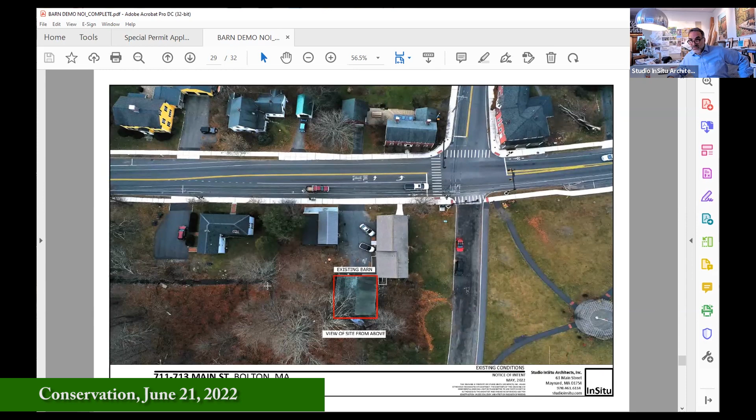Okay, so I've skipped ahead to the graphic portion of things. The first 29 pages I'm happy to return to if we think that's helpful. By way of orientation, the existing barn outlined in red, view from above, and of course a little tougher to see. The stream is underground, daylighted starting somewhere around here, exposed under the barn, underground again, daylighted here. And that edge is roughly consistent with our property line.

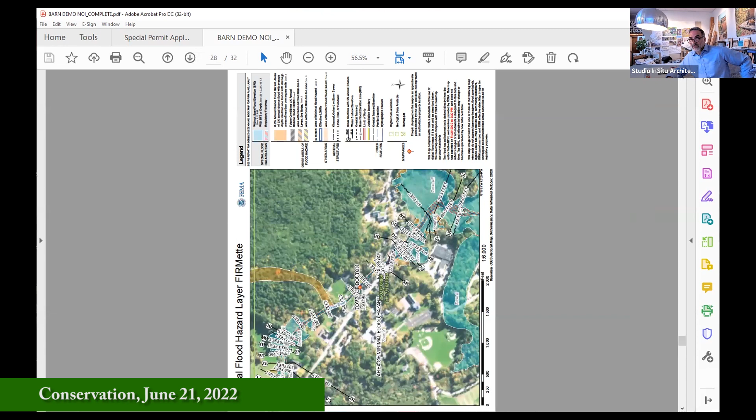Whoops, which way am I going here? Apologies, my scroll wheel is ticklish. Oh, I guess that's it there. Here we go, that's what I'm looking for. Let me try a different method here to get through image by image. There we go, all right. Give me a moment to zoom on this.

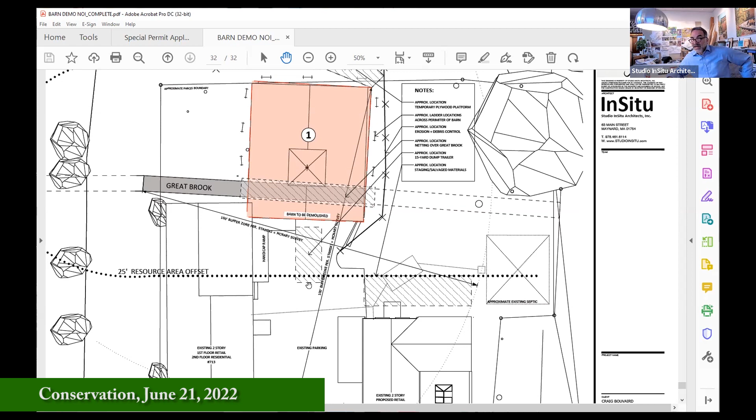So the way this would work is that trailer would be loaded up on a daily basis, and at least 3 times a week it would be removed from the site. In speaking with the demolition contractor anticipated for the job, he indicated 5 days a week. I'm just trying to hedge my bets a little bit and say probably 3 days a week at least, that would be out of there.

So I'm hopeful that the board would see some advantage in a dump trailer rather than a dumpster that might reside there in a kind of ongoing, longer way.

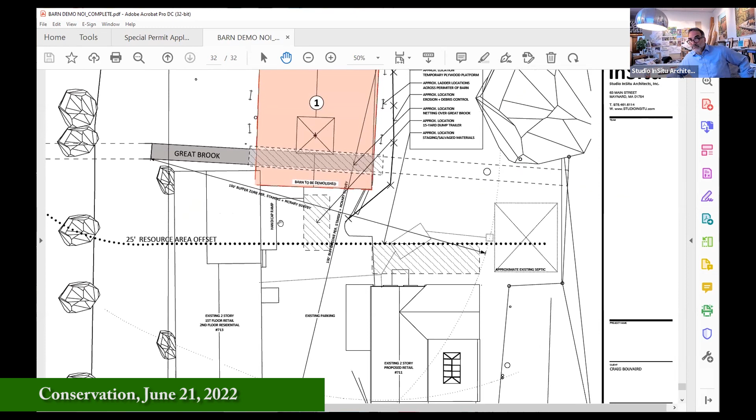So I think this graphic pretty well describes our erosion and debris control locations, the staging of the materials, the staging of our dump trailer, our point of access, except for that initial work that would happen by hand on the cladding. The rest of the work would happen from within the barn, with movement all in this direction.

So the controls indicated to the north and east would be for all those pieces of construction that didn't do what we intended to do. We're not going to be in here pushing anything out that way, we're going to be pulling everything in. So this is to kind of catch accidents and overspill and things that don't behave as we'd like them to.

So I think that's probably a good overview of the graphic.

Shall I, Mr. Chair or Rebecca, would it be helpful for me to move through any of the preceding pages and highlight some things there, or how would you like to handle this? It would be fine. I'm trying to think what are some of the things you're looking to possibly highlight.

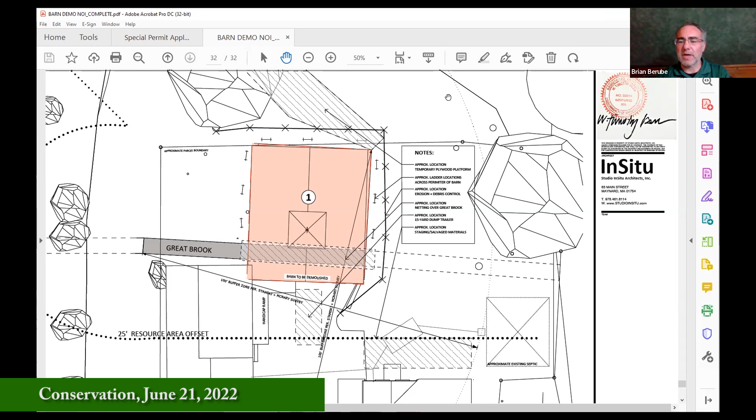I was going to ask you, you tarp over the stream, excuse me, during demolition, careful not to get anything in there, but once it's removed, before anything else is approved or anything else goes in, what's the condition that the stream's left in at that point? Are the tarps removed and it's just left exposed? Are we covering it over with something again? What was proposed for after demolition for how the stream is to be left, basically?

Yeah, that's a good question. We had not proposed any particular treatment or protection for the stream after. My sense would be that it would be essentially daylighted by the removal of the structure above and around it. Yep.

Okay, maybe I'm not sure what else you imagine, maybe some fall protection kind of thing for folks that might be accidental. No, it was more of a curiosity, and I'll probably follow it up too by asking Rebecca, is there anything major to expect from changing that section of stream that's kind of been in the dark for so long, to daylight. I don't foresee that as an issue, but I'd be curious as to what Rebecca said.

But it would be more protecting it against any type of erosion before something else is rebuilt there or proposed, what it would be exposed to as far as runoff. In theory, when you're done with the demolition, you're pulling up the erosion controls, but now that there's not a barn there and it's just a lot, do we have to worry about significant runoff down into the now exposed stream? I guess is where I was looking at that, just for the time in between, basically.

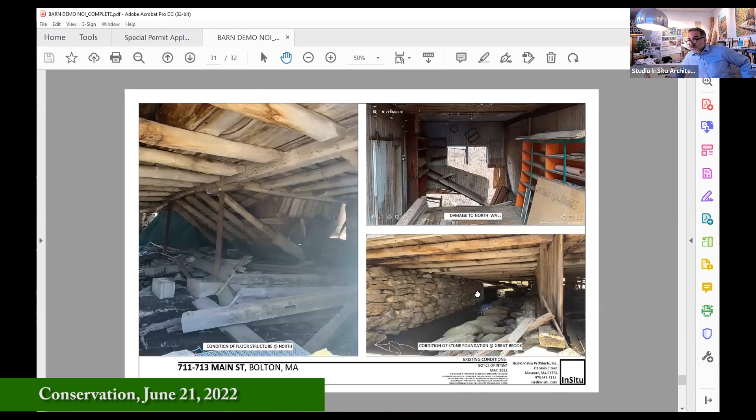Thanks, Rebecca. The condition of the wall visible on the left here, that wall is going to stay. That wall is in good shape. If we find anything else in remotely that kind of shape, it's going to stay. What's along here, I can't imagine a good reason to remove that stuff.

Much of the rest of the foundation is just not visible enough for us to get a good look at. So I think my concern would be that the commission can condition that the stone walls remain, or the stone channels remain on either side of the brook, if they wanted to. Mike? Nope.

I'm here still. Okay, you have the netting over the brook as you've proposed, or the tarp, which is great, and it's going to protect as you're removing the timbers. But you're having it over the brook. I'm presuming that you're having it basically anchored to those two sides. So once you remove the timber and you daylight the stream, which isn't necessarily a negative at this time, then you're going to have an exposed brook. I want to be sure that we're not impacting it by impacting the sides and the channel of the brook at this time. If you are proposing to do that, that needs to be very clear and laid out to the commission, which I do not see at this time in your application. So I'm presuming, and it sounds like you're under the same presumption, that that is not part of the plan.

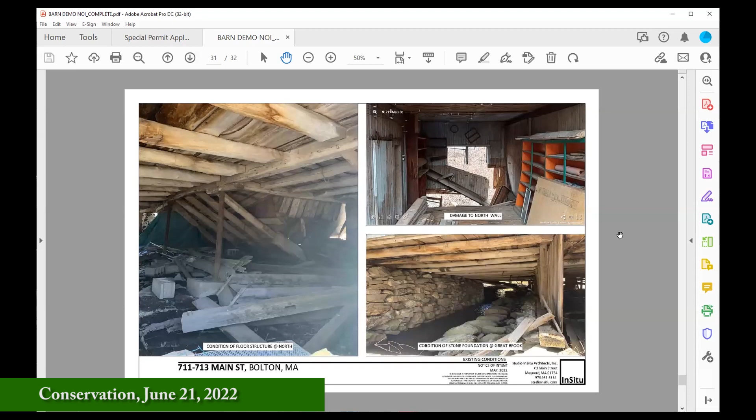How big of a drop is that? Is it like a 3-foot drop, 4-foot drop? We have drops like that all over town as far as protection goes, but can we condition it like an after-the-fact thing, once the barn is removed we can see what's actually exposed and how it may need a wattle, or may not need anything, not just a fence or anything of that sort? Can we do it after it's all said and done and we actually see a better picture than what we're looking at right now?

So the commission is able to issue an order of conditions with the relevant conditions. The applicant is able to come back to consider a field amendment. So for instance, if once it's demoed, the commission conditions that there's erosion control necessary, silt fence, whatever the perceived need is to protect the resource area, at that time, if it's perceived that the site is stable, the applicant has the ability to come back to the commission and say the site's actually more stable than we had originally perceived. We don't feel a wattle's necessary, but maybe the silt fence is, or the silt fence not but the wattle may be, that sort of conversation. But that, I guess, is the way I would propose to address that versus not having it.

You can't add a condition in afterwards unless the applicant comes forward with a new filing or there's an enforcement order, or they feel that it's necessary so they throw it on there, but there's really no enforcement ability of the commission unless there's a problem with it at that time. Okay, got it, good.

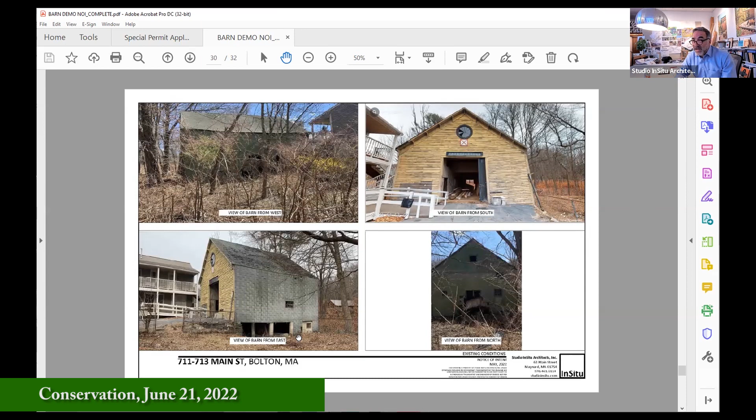If I may, to the simplest part of that question of how high is that wall, the photo on the lower left here may give you a sense of scale. I'm going to gamble that it's about 5 feet high. I can't quite stand up in there, but you don't have to crawl.

Other commission members have questions, comments? And is there anybody from the public here tonight with a question and or comment regarding this? I'm not seeing any.

Well, I just have one last question. Go ahead, please, Lori. When do you think you're going to be coming in front of us with a notice of intent to put the new barn in? Yeah, the short answer would be as soon as possible. You have seen on your agenda we're going to be before you starting about 13 minutes ago for our RDA for 711.

I think there are a couple of hurdles that are just a bit more acute and immediate, but as soon as we clear those, it could well be this fall. Is that a helpful answer? Oh, that's good, thank you. Yep. I mean, conceivably sooner, but we've got a lot to do. Believe it. All right.

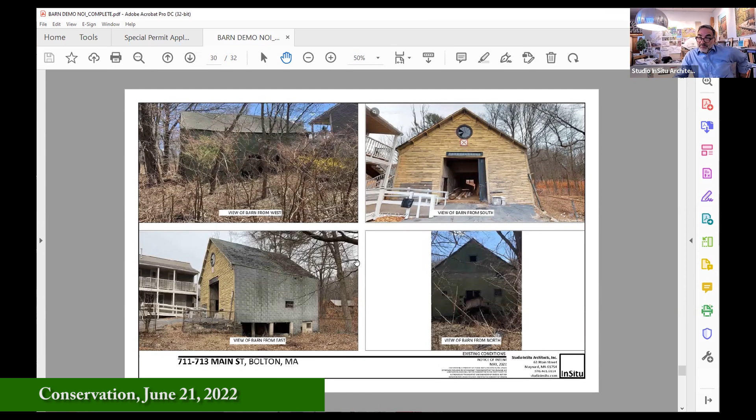Thank you. Yeah, I think if we're not going to vote till next meeting, it would be a shame to shut down the ability to ask and answer any questions until that time. Okay, in that case, unless anyone else objects, I'm going to move to continue.

I'd like to make a motion that we continue the public hearing for the notice of intent for 711, 713 Main Street, the demolition of an existing barn, until our next public meeting.

Is it July 6th, Rebecca? I believe it's the 5th. It may be beneficial to confirm with commission members that they are available that evening. We're still remote on that date, to note. I believe we have one more remote meeting before we go back, after the 20th of July. So I would put that out there to commission members.

Would people be available for a July 5th meeting? Brian, I'm not available that week. Okay, I'm available. I am. I am, but not the 6th. The 5th, yes. I should be available the 5th too. So we should be fine, right? Especially if we get Paul. Okay.

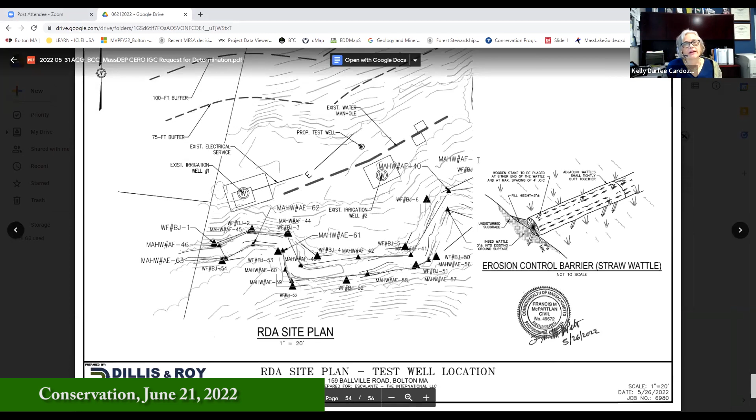Rebecca, is the applicant or someone representing the applicant here this evening? Yes, they are. They should be unmuted at this time. Hi, can you hear me? Yep. Okay, thank you. My name is Kelly Durfee Cardoza with Avalon Consulting Group, and I'm here tonight representing Escalante International. I have with me Steve Brennan, who is the general manager of the International.

I know several of you on the commission are familiar with the International, but for those who aren't, it's located between Ballville Road and Wilder Road. It's occupied by two 18-hole golf courses and a 9-hole golf course, called Twin Springs.

Irrigation water is provided by two irrigation wells, 1 and 2, shown on this site plan. They're both 128 feet deep, installed in 1956 and 1981 respectively, and permitted under the Massachusetts Department of Environmental Protection Water Management Act.

Well 2 has failed and needs to be replaced. There are two reasons we're proposing a test well just north of well 2 now, and to replace it in that location. The first is to maintain approval under the Water Management Act, we need to be within 250 feet.

The second reason is that prior to the installation of well 2, there were test borings completed down the driveway. You can see by the topography here there's a hill and a flat area going down to the wetland to the south. That flat area is a gravel roadway, where the test wells were done, moving east closer to the golf course.

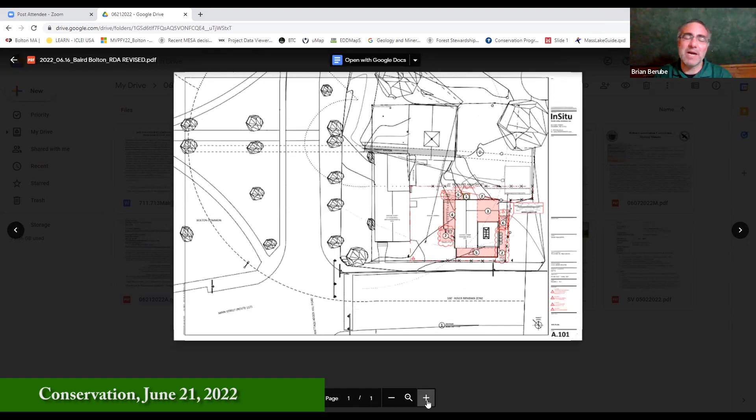So just pulling up my notes. Rebecca, are you ready to move back to 711, 713? Yep, all right. I guess I would. So the Conservation Commission will now continue the public hearing for a request for determination of applicability for 711/713 Main Street, the proposed renovation and addition to a 2-story building on site.

For our loyal viewers and listeners, you can remember last time we had kind of gone through what the RDA was requesting, and we had requested of the applicants basically to put in some specifics. Oftentimes an RDA isn't considered for something this close to a riverfront area, but I think we were all in agreement that this is a very unique lot, an interesting location, and the building itself is degrading before our eyes. So we asked for a little bit of an extra amount of specifics to be put into the RDA, which I was looking through.

It looks like they have come back in. I didn't have additional questions. Well, I shouldn't say that, I should kind of flip through my notes. I didn't think I had additional questions as the RDA is proposed and written out now. So I want to open it to members of the commission first, if you have any questions, comments, or thoughts based on how this RDA stands now.

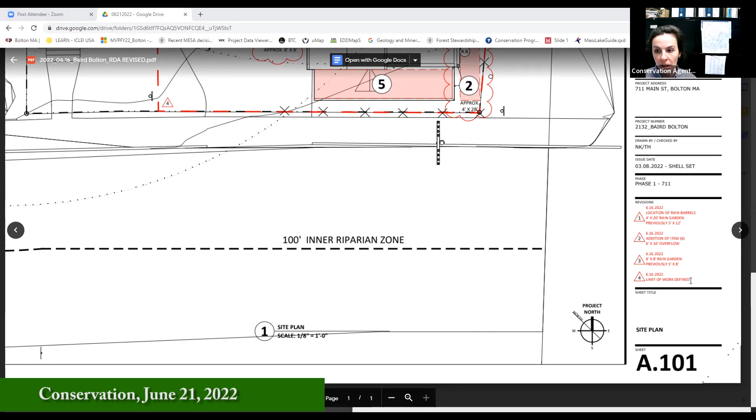May I also suggest, to directly reference this plan submitted by Studio InSitu Architects dated 3/8/2022 with a revision date of 6/16/2022, to ensure that we have the most up-to-date plans referenced.

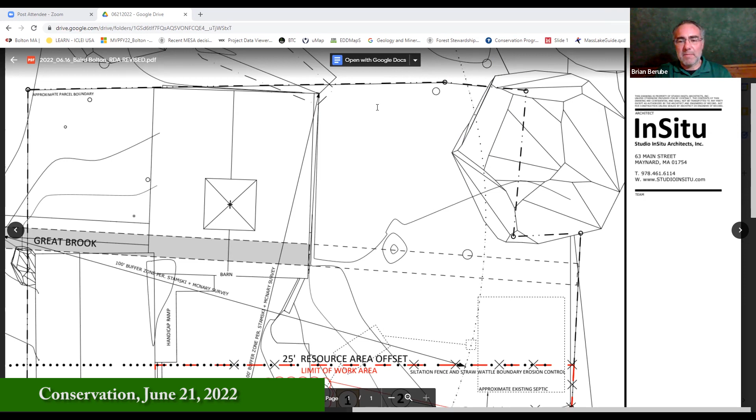So the condition is that the conservation agent has a chance to inspect erosion controls before construction begins, and that the plans we are agreeing to are those drafted and presented at this evening's meeting, with a revision date of June 16th, 2022 attached.

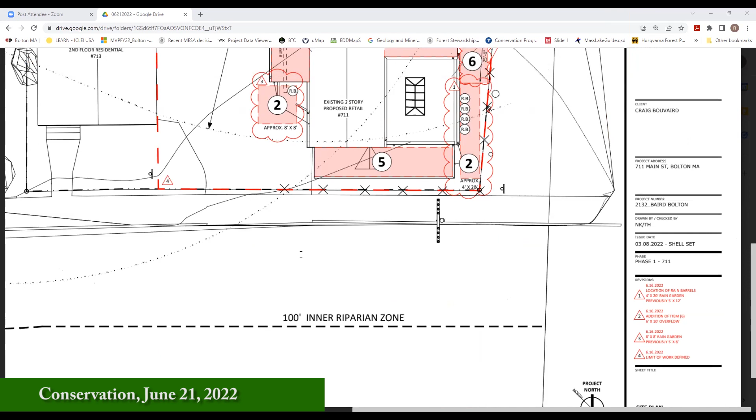Do I hear a second for that determination? Second. All right, all those in favor, starting with Jillian, Aye. Bill, Aye. Jim, Aye. Lori, Aye. And Rebecca, I am an aye as well.

So we will finalize the draft of that determination. It will be available for the commission signatures. Upon receipt of the final signature, I will notify In Situ, or Craig, whomever is preferred in that case, and we can coordinate pickup or who the appropriate party is to mail it to. Sound good?

Rebecca, thank you. It's Craig. Would you notify Tim at In Situ, please? Yep. Thank you.

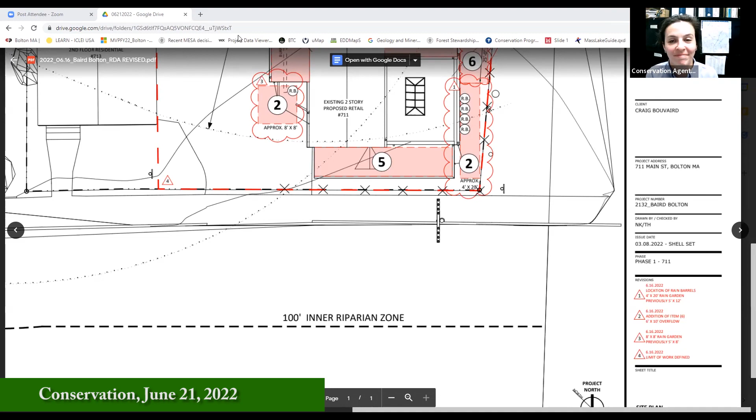In that case, the Bolton Conservation Commission will now continue the public hearing for a request for an abbreviated notice of resource area delineation for 580 Main Street. Rebecca, is there an update on this project?

If I mute myself. There is, in that we have fully contracted our peer review consultant. It will be a soil scientist from BSC Group, and they are working with the property owner to coordinate a date to go out on site to conduct the peer review.

That being said, the applicant has requested a continuation until the peer review can be carried out, understandably so. To note, both potentially relevant to this resource area delineation, but I'm not sure it will make a difference, but relevant to just the permitting process going forward.

The state has notified us that there is a mild drought for central Massachusetts at this time. Bolton is included within that area. So just to be cognizant of that.

Commission members have any comments, questions? All right, in that case, I'd like to make a motion that we continue the public hearing for an abbreviated notice of resource area delineation for 580 Main Street till our next public hearing, Tuesday, July 5th at 7:30 PM.